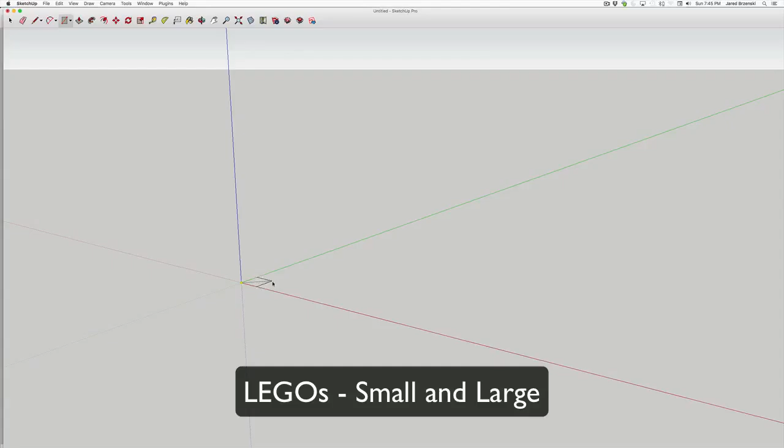All right, this one's for the little Lego and the big Legos. They are both super similar. We'll start with the tiny Lego first. You draw it, you make this little shape. You're going to center a little circle on the top.

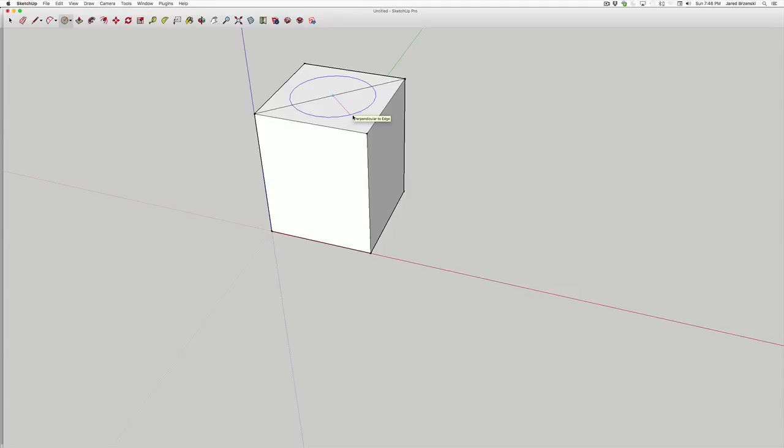All the measurements are multiples of this thing called a Lego unit, and that's why all Legos fit together. I can find the center real quick by drawing a line across it, and the center of that line is the center of the circle. I'm making sure my radius is the correct measurement. I delete all this extra stuff, and then I push it up.

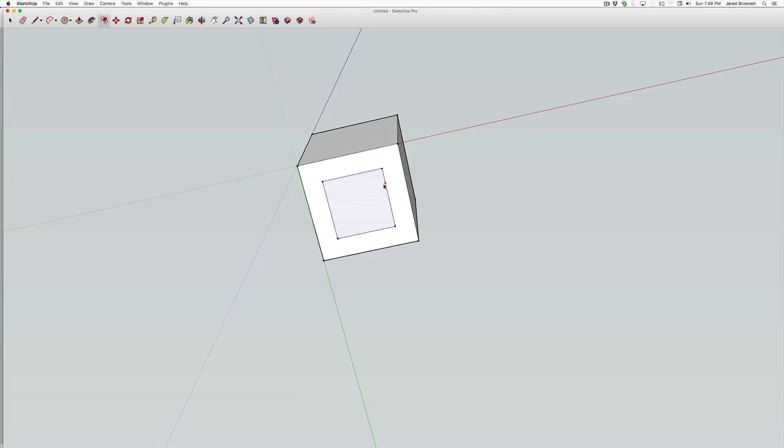The basic Lego unit, 1.6 millimeters. So there's the top piece. To make the hole in the bottom, I'm going to use an offset tool, and then push it up the appropriate distance. And then you have a 1x1 Lego.

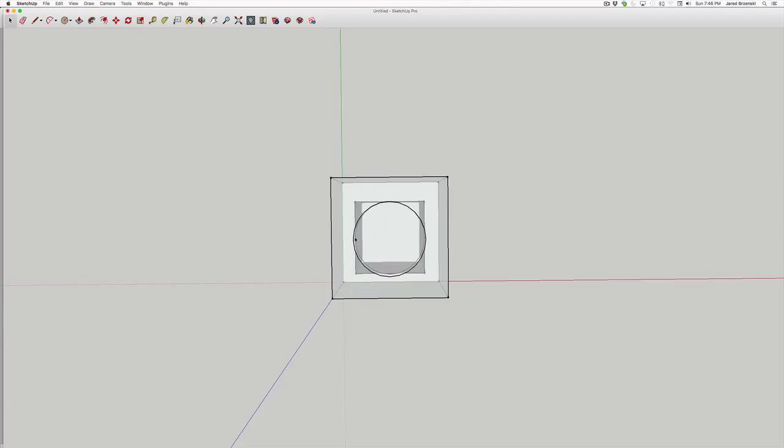You can double check. When I turn it X-ray, you see the button on the top fits perfectly between. It's right at the line of the walls that are on the inside. So this little button would fit inside of another piece perfectly. Turn those off. Okay, the 2x1 Lego is the same deal.

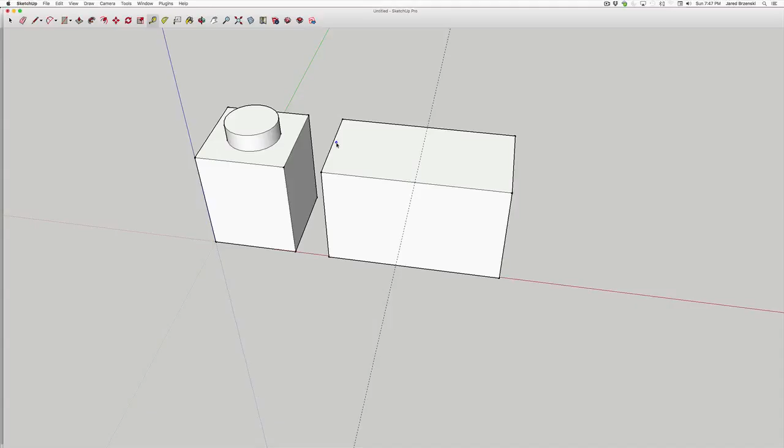It's just a little bit bigger. It's exactly twice as big. You can measure and find the center and draw lines. However you want to do it, it really doesn't matter. I like this way because it seems to be the quickest. Delete a few extra lines you don't need.

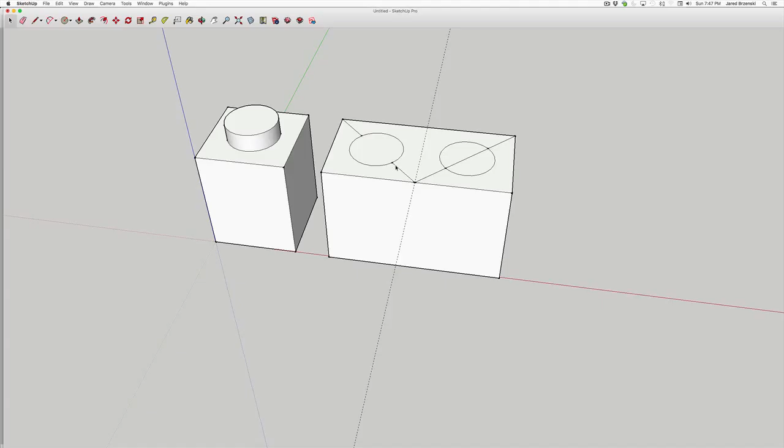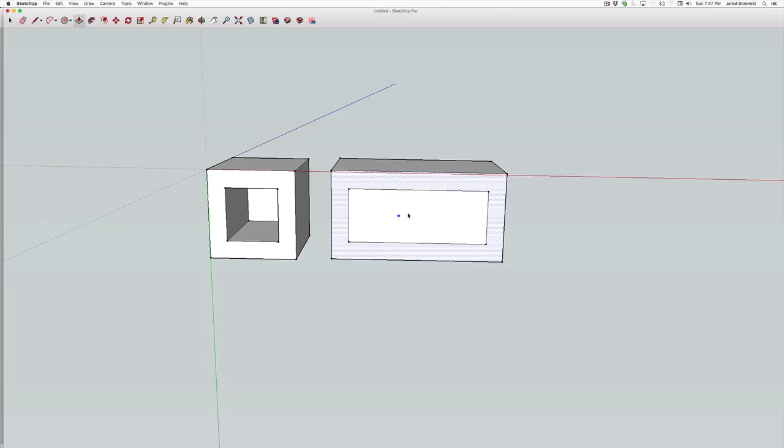All right, you got the buttons on top. On the bottom, same thing. It's going to be a rectangle. Except on this one, on the inside, there's this other little circle. It's going to be hanging down in the middle. So it looks like that.

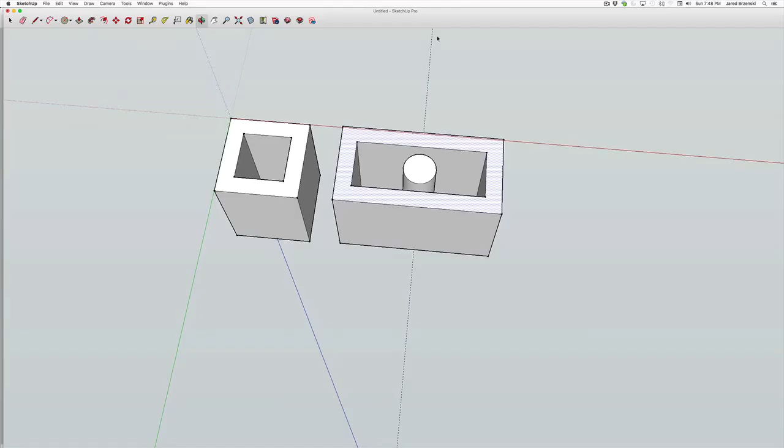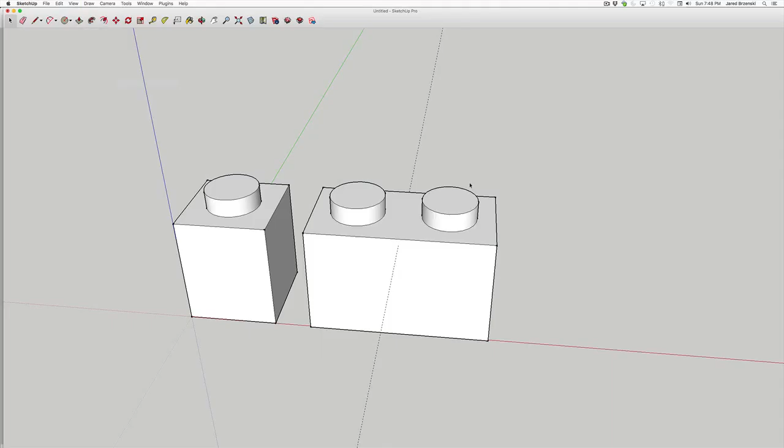And again, when I look from above, that circle on the inside is perfectly centered between those two on the top. And then my two on the top go right to the edge of the box on the inside, so they'll fit inside real nice. Those are the two small ones. I'll do the bigger ones right next to it. So again, it's pretty much the same deal.

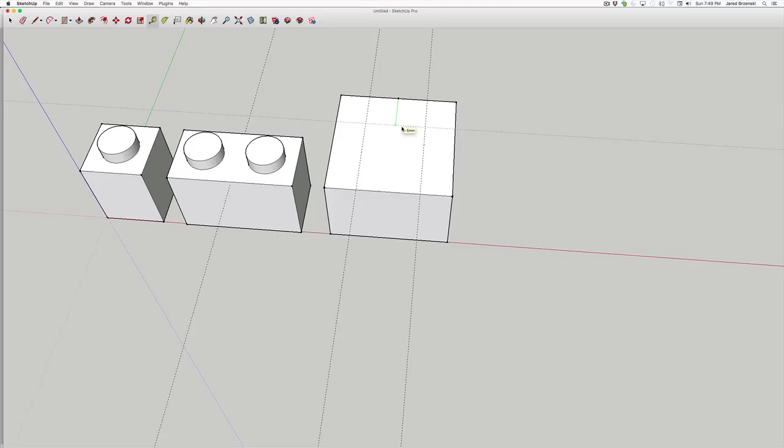This one is 2x2. For this one, I'm going to use this because it's easier. Well, there's probably some pretty cool way of finding the centers of these without. And now I got these points here. I'll just draw them. You can also move them with the move tool and just copy and paste a bunch of times.

And when you move them up, if you move one right, you can move this up. And I haven't clicked again, but I'll go over here. And you see I use this as an endpoint, and it will make that one exactly as tall as my first one. So as long as I make the first one right, the second one will come out fine.

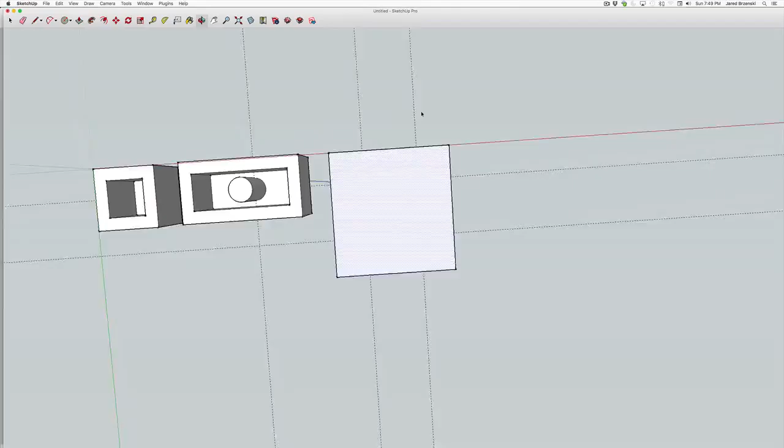All right, on the bottom of this, again, the walls are always the same thickness. Every Lego, it's always the same thickness of the walls. This one in the center, there's going to be two circles, an inner and an outer. And most of these things are multiples of a Lego unit except the outer.

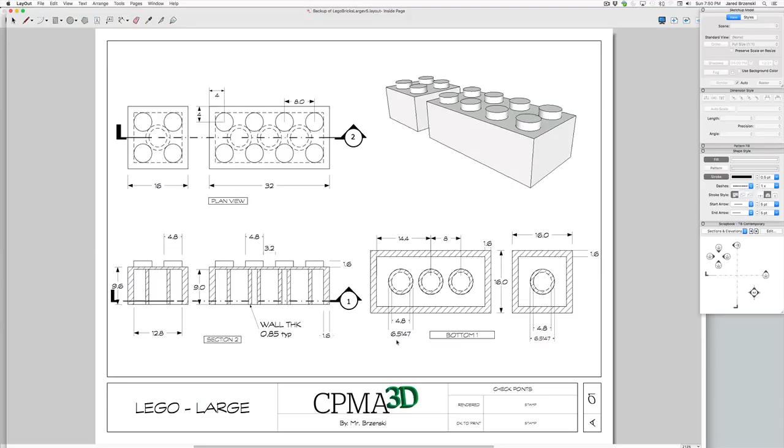The outer is actually the square root of the distance between two edges, so it's not a happy number. But you can use a calculator and figure out what half of that is for the radius. All right, back to, there we go. That looks right.

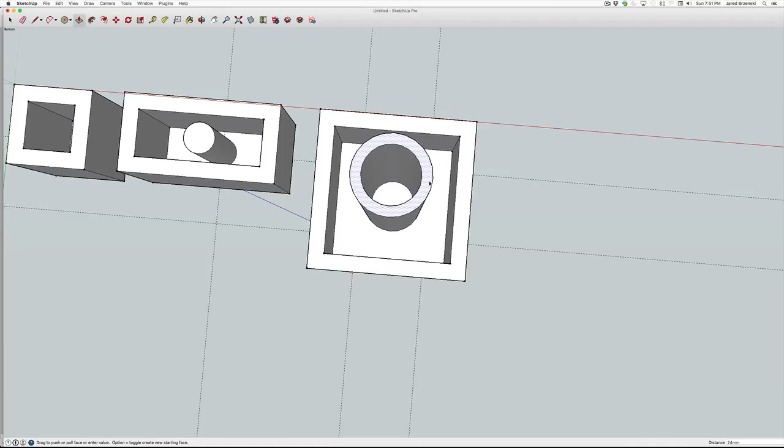And then for this inner portion, you're going to pull up that ring in the middle. And here, I could pull it up, I could type it in, or because I want it the same distance as this edge, I can click, and now it's exactly the same distance. Double checking, making sure it's right. If I view, my circle is perfectly centered between the 4 around the outside.

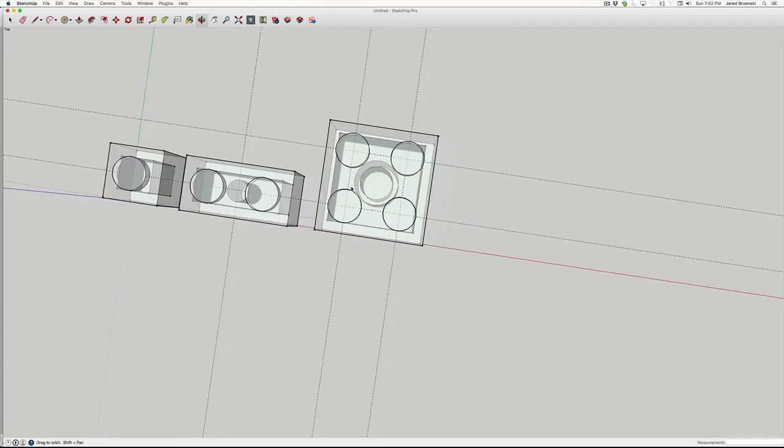Just touching, and these 4 on the outside, they go right up to the edge of that hole in the background, right here, and all 4 are nicely centered. And then the biggest one is basically just 2 of these kind of tagged together. We'll do that one real quick and be done.

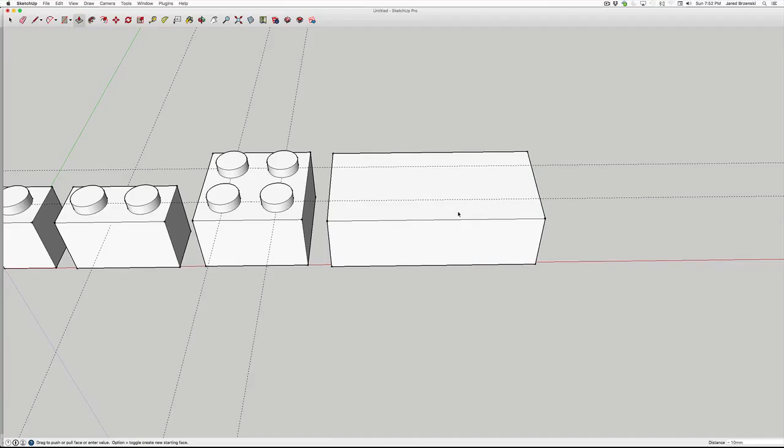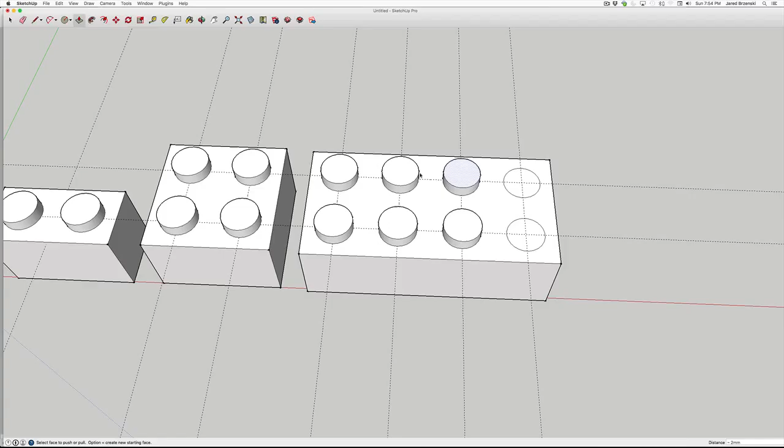Again, they're all Legos, so they're all going to go up the same distance. They have the same, use different tape measure lines. Again, they all get pushed up, and I'm going to use this one as a guide so I don't have to keep typing. You do the same thing when you're drawing the circles. It's just a little harder to line them up just right.

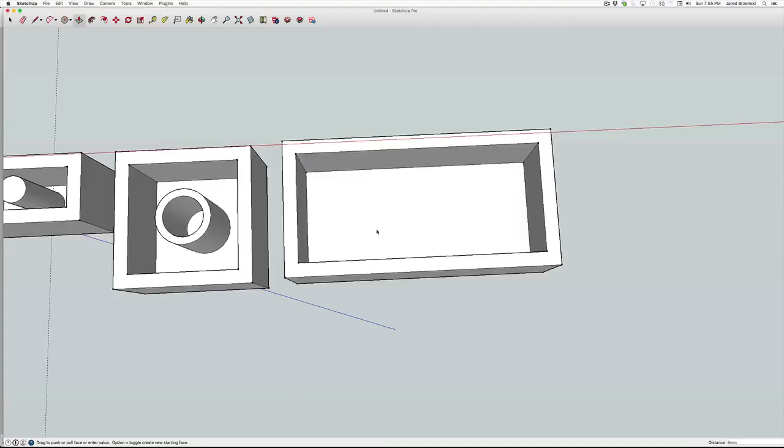Alright, and then you get the same offset, 1 Lego unit. And then inside, get the center line, and then exactly halfway between those. I don't remember what this is, so I can look at a blueprint. Oh, it's 808. There we go, and there's all my centers.

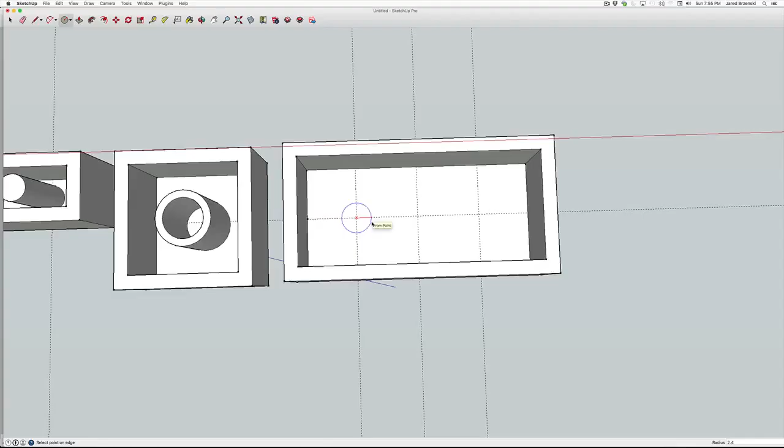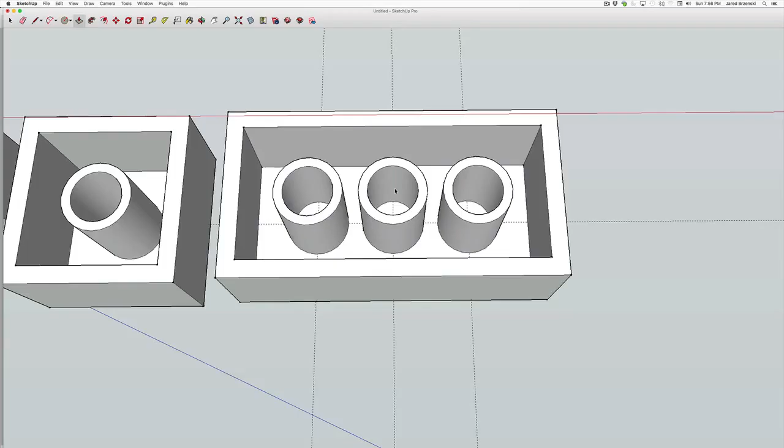Alright, and again, I just want to pull those ring parts up. We'll line them up with this outside edge. But you can always type in the measurement. I'm going to line them up just so they're all right to the edge. And again, I'm going to delete these lines I drew.

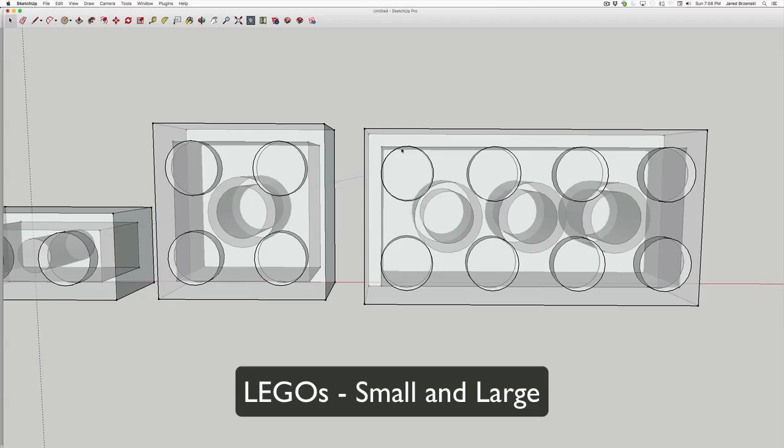And if I go to view the face style, each one of those circles is perfectly centered between the other 4. And my rings are right up to the edge. Or the dots on top are right at the edges of the box in the background. And that's it. There's small Lego. This is a 1x1, a 2x1, a 2x2, and a 4x2. And these are all the Lego projects.